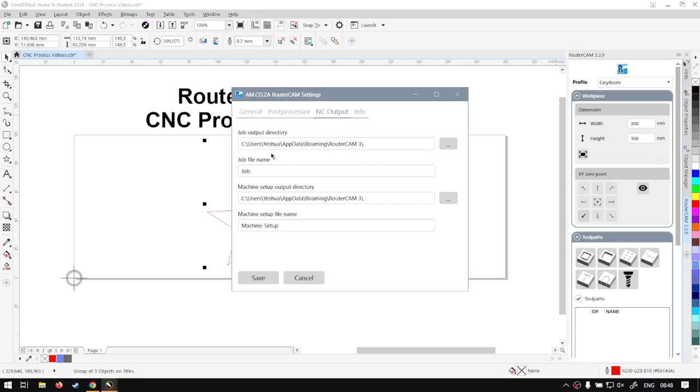First of all, like in most projects, you want to make sure everything is in order. We've got these graphics, they're all grouped as one layer, because I'm going to use the same pocket milling for them. Then you also want to make sure your settings are right on the NC output, that your output paths are fine, so you can actually find the file and copy it onto your machine. If you're running with network, you might be able to set up a path like that, otherwise just copy it to a flash drive, put it on your machine, and then it's ready to go. Then you want to make sure your project or work piece is set up, so you've got the right dimensions, then your origin point, where mine's already set to bottom left. This will obviously depend on your machine setup, which we covered in the previous video. Then if I minus that out, now we're going to go look at pocket milling.

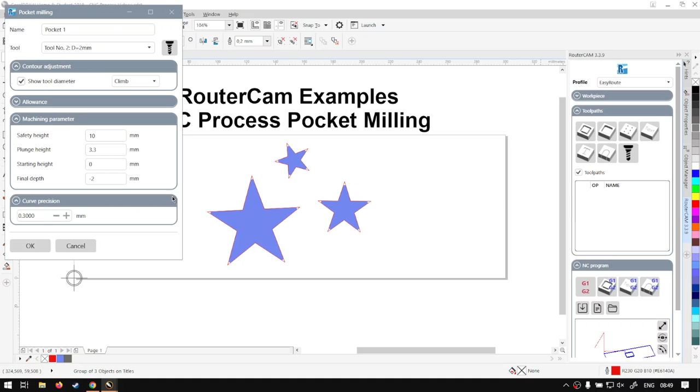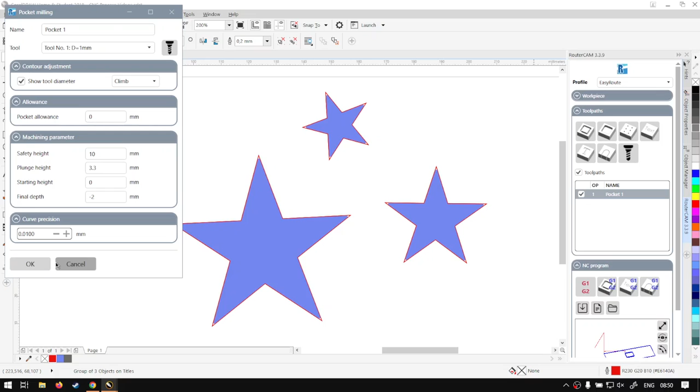I'm going to leave it on climb, pocket allowance. I don't think it's necessary to set it yet, unless you wanted to get it just on the inside, but you could. I'm going to keep mine 0 because I like the size of the stars where they're located already. Safety height, once again, if you have something like clamps holding your piece down, then this can get important, but I'm going to leave most of these settings, plunge and all that, the same. Final depth also -2, and this one we can leave because we don't need it too clean. Say OK, and then once again it would be good naming this properly. I just called mine pocket 1, but that's only because I'm only doing one form of milling here. If I had multiple things, I would definitely want to start naming it.

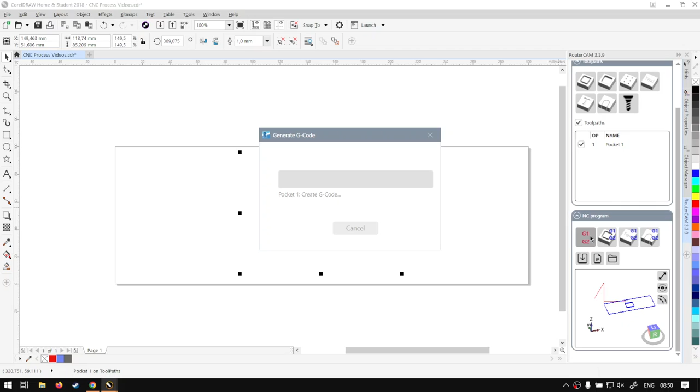Then let's go to the G1, G2, run the process. We'll wait for it, it's going to take a while depending on the amount of information you are looking at. This one is taking quite long, so what I'm going to do is pause it, and we'll resume once it's ready. Yeah, this thing is just about done.

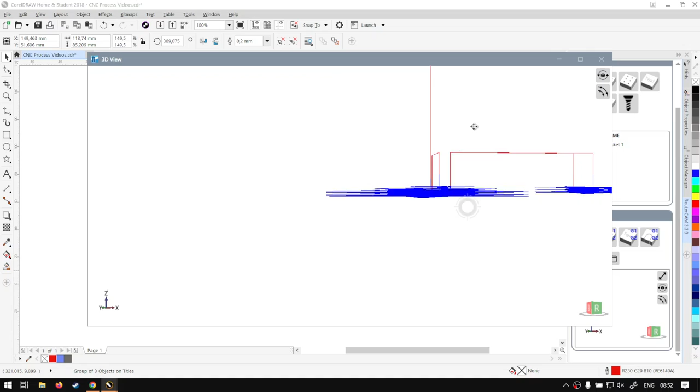Now once it's done, we've got a nice little preview here of the cutout. It's going to look, as we can see, nice and clean. Obviously you can decide, for instance, to engrave different depths for each individual one if you wanted to, but I figured I'll just keep it simple. Then what you want to do is, you can go show G-code if you want to preview, make sure everything's in order before you send it, or we click save here, and then just call it, I'm going to go PM for pocket milling. Save that, put it on your machine, and the rest of the process will happen there.

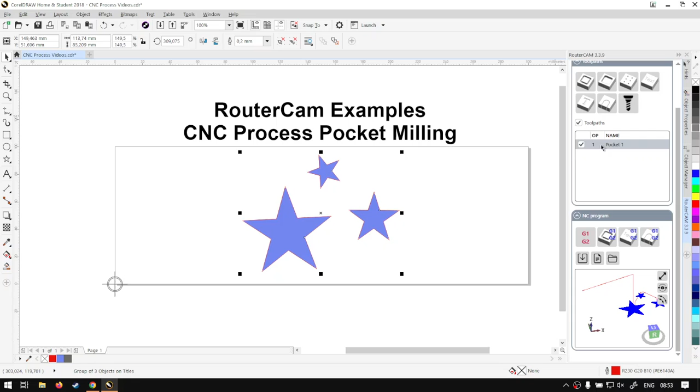So it's rather simple. Like I said, most of these examples are going to be very similar, except for maybe drilling and so forth, but there's one or two settings that might change between them.